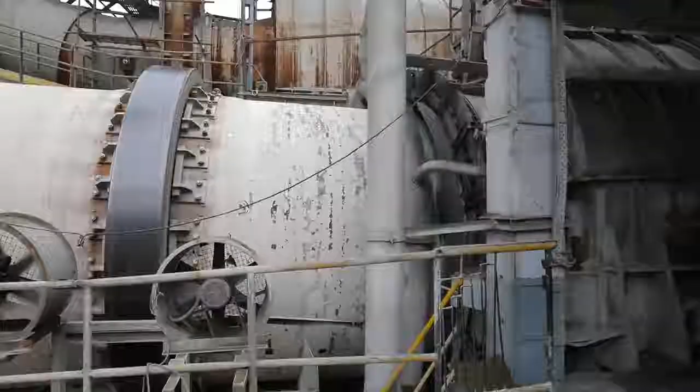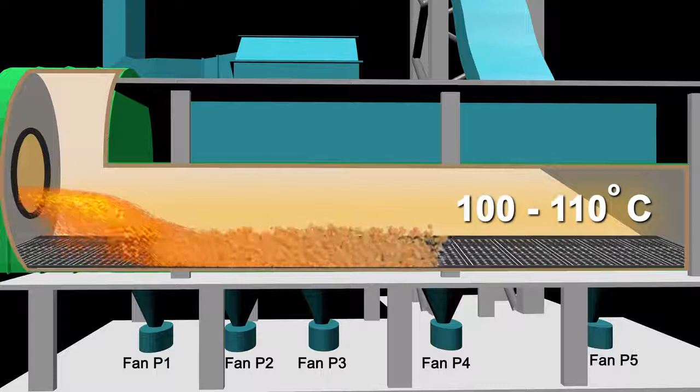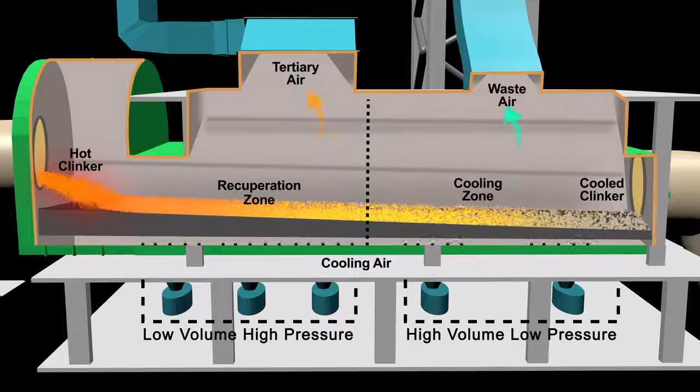It is cooled to 100 to 110 degrees centigrade with the help of a series of cooling fans. At the start, these fans are of low volume and high pressure, then give way to high volume and low pressure. Most of these fans are controlled by variable frequency drive for energy savings.

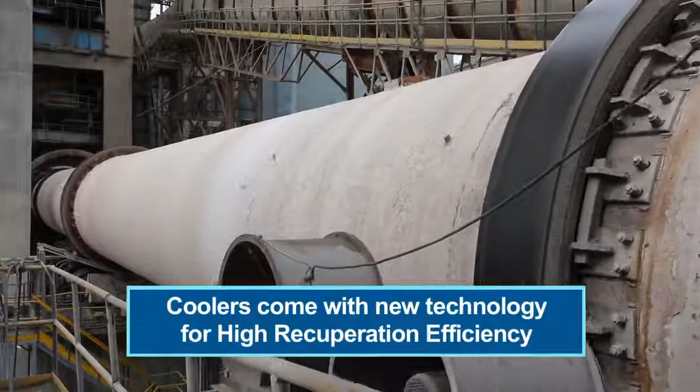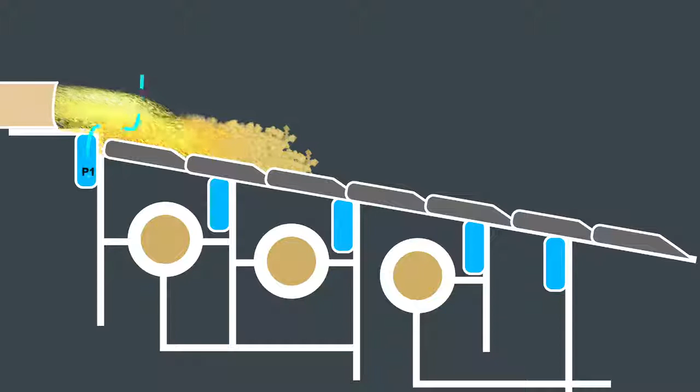These coolers come with new technology for high recuperation efficiency. This technology is used in the recuperation zone of the cooler for best possible heat exchange. These high-efficiency coolers require low specific cooling air, thereby reducing the power consumption also.

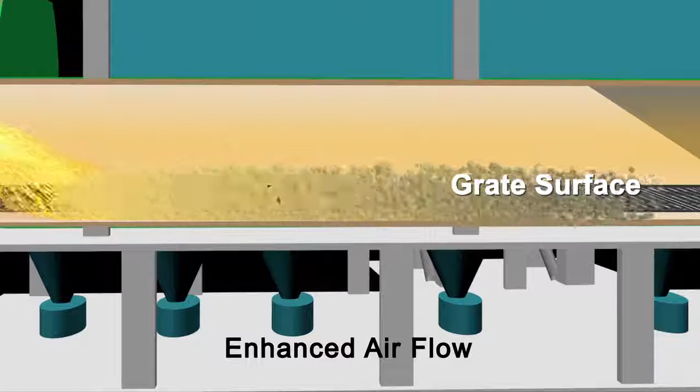It also comes with the latest design grate surface, which is now a part of all energy-efficient coolers and can be used to upgrade existing grates. They not only enhance the entire flow of air, but are also self-cleaning. This makes them ideal for the rough atmosphere of the modern cement factory. So effective is this cooler that its recuperation efficiency is more than 72%.

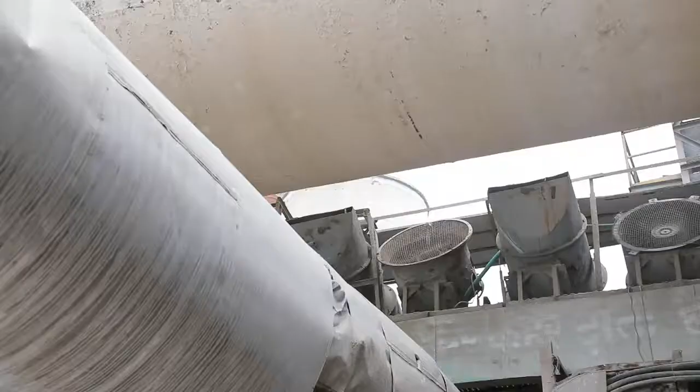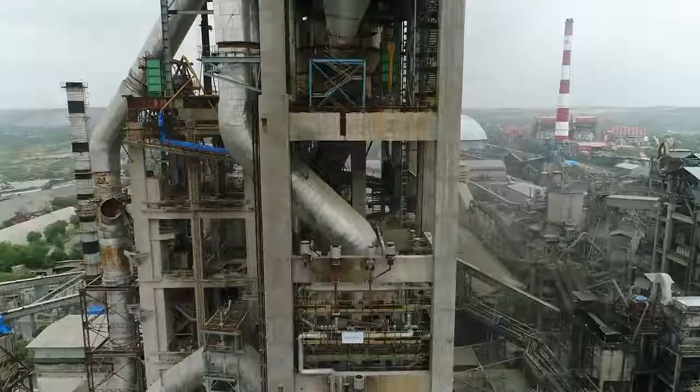Now let us talk about the cost implications of the energy-efficient coolers. The cost of installation is dependent on the capacity of the plant. It can range anywhere between 70 to 100 crore rupees. It may seem like a significant investment, but the benefits derived from it are huge.

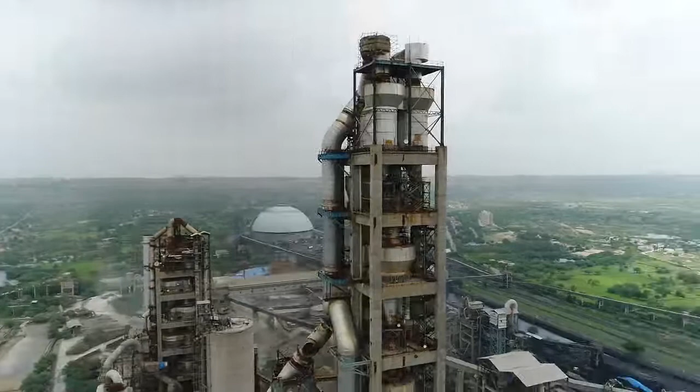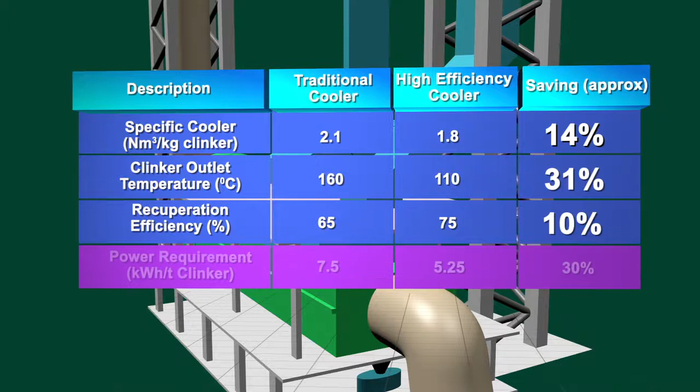When you compare with the traditional cooler, you will find that on all counts, you save significantly with an energy-efficient cooler. There are approximate savings of 14% in specific cooling, 31% in the clinker outlet temperature, 10% in recuperation efficiency, 30% in power requirement, and 11% in heat consumption.

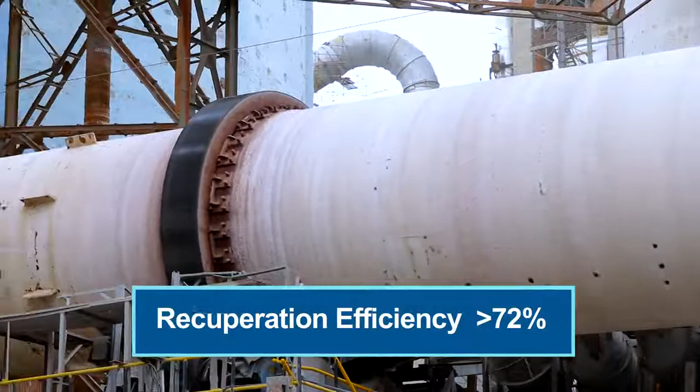With recuperation efficiency of more than 72%, the savings are immense. You save electrical as well as thermal energy, and so save on costs. Their maintenance is less, and so you save money there too.

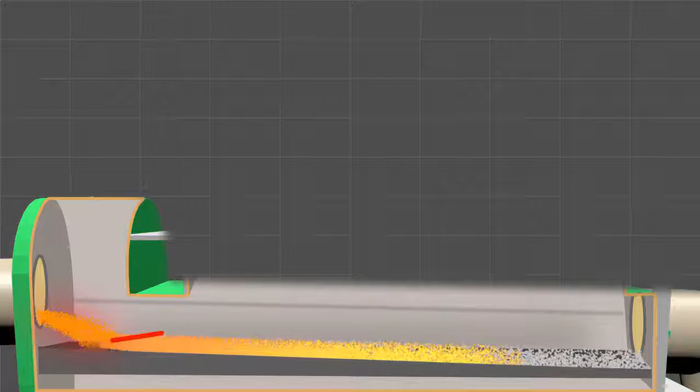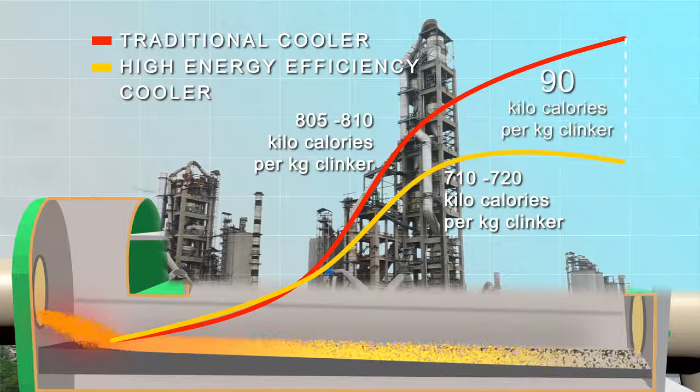The heat consumption which was coming in the 4-stage preheater of kiln number 1 was 805 to 810 kilocalories per kg of clinker, and after installation of this 6-stage preheater, this energy consumption has come down to around 710 to 720. By this way we have saved 90 kilocalories per kg of clinker.

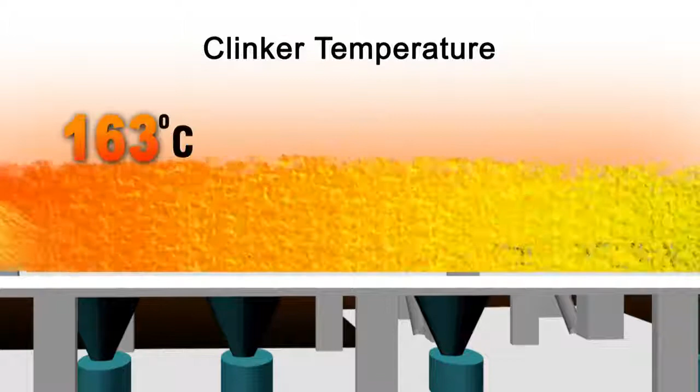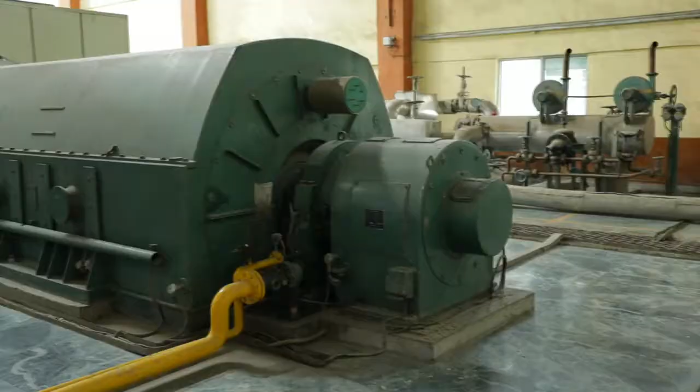Clinker temperature going outside the cooler was in the range of 163 degrees centigrade, and after installation of these modified plates, outward clinker temperature has come down to 111 degrees centigrade. Thus, it's a huge saving, and that extra heat which was going outside through clinker has been recouped for our power generation in AQC.

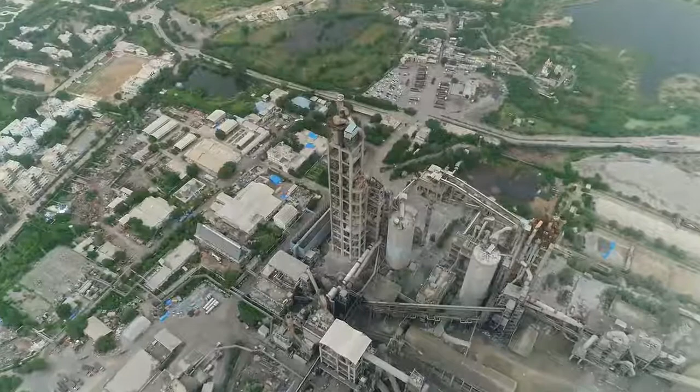Energy efficient coolers have huge potential in India. They can be installed in most cement plants, contingent to existing configuration and operating process parameters.

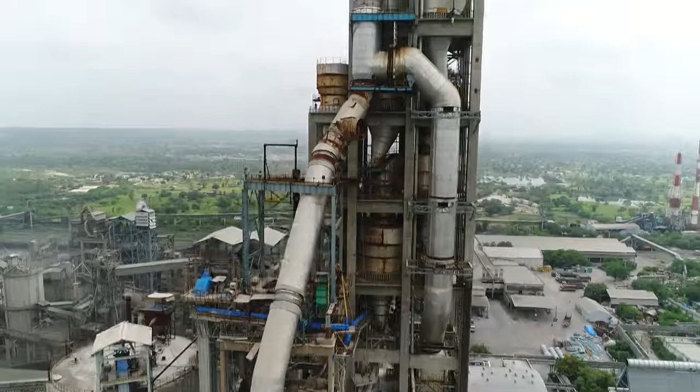The next generation coolers and high efficiency preheater towers save energy, save money, and in the long run, save the planet. We'll be back soon with more